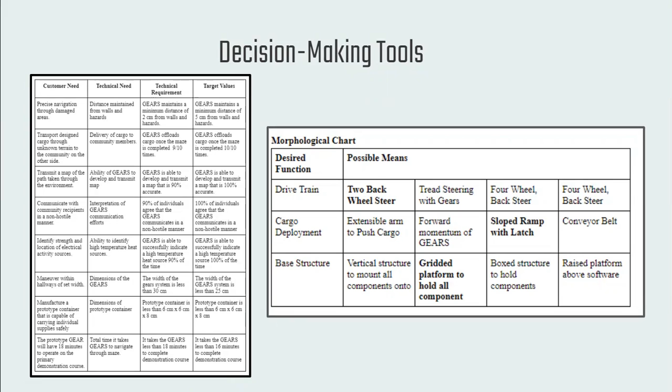In terms of the design, we created a morphological chart to decide how we would like to achieve the main mechanical components of the GEARS, and we divided the GEARS into three main parts physically: the drivetrain, the base, and the cargo deployment mechanism.

When first conceptualizing the GEARS design and the necessary technical requirements, our team focused mainly on hazard detection and ease of mobility. In order to maintain a minimum distance of 2 centimeters between non-traversable terrain, we knew ultrasonic sensors needed to be mounted on the sides and the front of the GEARS.

These sensors output the distance between the device and the objects in its pathway, so any terrain in its pathway would be detected. In order to drive around and avoid the terrain, our team knew a 2-motor powered driving system would be necessary for minimizing the turning radius while also reducing friction opposing its motion.

If the stability point was made from rubber tread, the powered wheels would not rotate and turn the device about its center point. Instead, the rubber's frictional force with the ground would apply torque in the opposite direction of the GEARS' angular velocity. This would prevent smooth, eased turning.

Therefore, removing the rubber tread from the wheel and leaving its inner rim would dramatically reduce that frictional force and allow the device to turn with very little opposition.

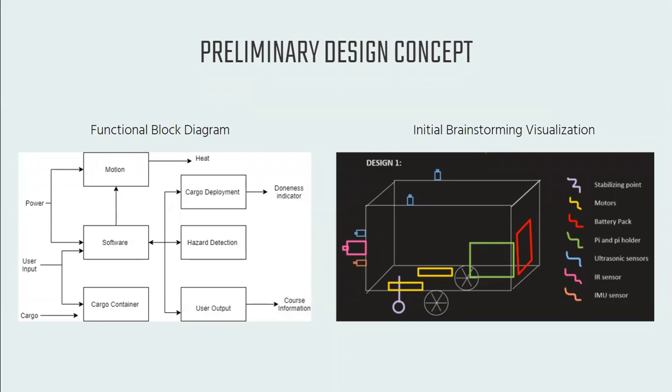After further investigation, our team determined the size of our cargo container was to be a maximum of 6 centimeters by 6 centimeters by 8 centimeters, and therefore, as seen in these images, a space in the front of the device was set aside for this 3D design container.

Some positive features of this first iteration included successful turning, as the 2-motor powered system with the treadless wheel stability point allowed the robot to maneuver with better precision.

Also, with the platform designed to hold the Pi holder and cargo container, the initial design had a sturdy foundation in order to hold the necessary cargo weight.

Finally, the ultrasonic sensors and IMU sensors were optimally placed for ease of detecting hazards, and magnets representative of high electrical activity.

Some negatives included the lack of cord management and a lengthy posterior. Both of these unfortunately meant that the GEARS prototype would hit walls as it turned and brushed up against hazards.

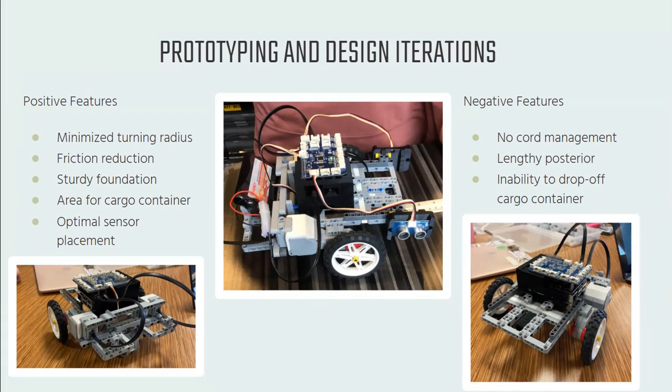Also, this prototype turned based on time. The motors would run at a certain speed for a specified amount of time, roughly turning in multiples of 90 degrees. This unfortunately had a large margin of error, especially on surfaces that were disleveled and caught the stability point during the turn. Finally, this device had no ability to drop off the cargo container, only the ability to keep it on its platform.

With further testing, analysis, and tweaking, our team determined the navigation system needed a gyro sensor, a sensor which outputs angle displacement. For precise turning, this was necessary because it ensured the gears would not over or undershoot specific turns, especially around sharp corners or when turning around completely.

Then, during testing, our team also built a slanted ramp system and a motorized arm on the front of the cargo container for the cargo container to be held and dropped off properly. The motorized arm would stiffen and lock the cargo container into place while the gears would maneuver through the destroyed area and then rotate down and out to the side, dropping off the container at the location of the recipient community.

The slanted ramp used the gravity acting on the container to slide off and onto the ground when the motorized arm rotated out. This kept the cargo from spilling out of the container and the container from sliding off the device while driving through the terrain.

Finally, testing also meant being able to move around sensors for optimal placement. The IMU sensor and IR sensor were both moved to the very front beneath the cargo container in order to detect hazardous zones and dangerous activity, and the ultrasonic sensors were kept on the sides and front of the device for detecting the walls representing terrain.

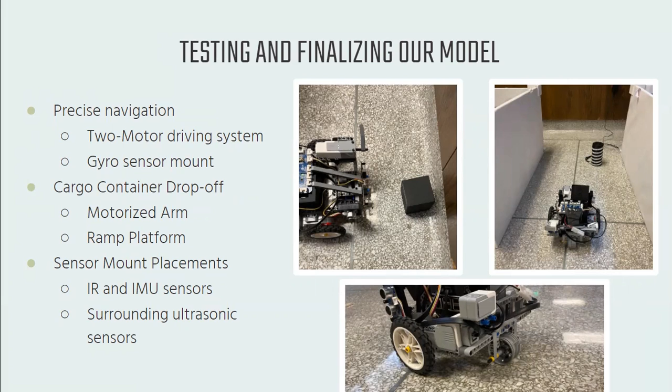The battery holding structure was removed from the posterior and the cords were wrapped and managed to prevent any contact with the gears and any hazard it encountered.

The final gears design seen here has a few unique features, such as the motorized arm, which holds in the cargo container while the device maneuvers the damaged area. The two motor drive and stability point were used to optimize navigational precision, reducing the turning radius and frictional forces, and the cargo container ramp

was slanted for the container to drop off at the recipient.

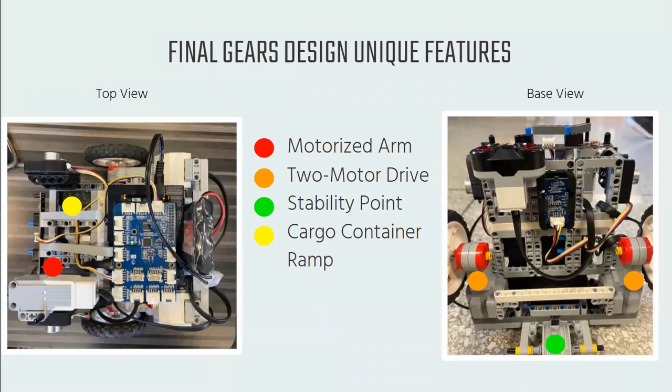So for our maze solving algorithm, we first chose to use the left wall maze solving algorithm. This algorithm follows the left wall at all times and is guaranteed to get out of the maze if the maze is solvable. First, the gear will check if the left wall is greater than 40 centimeters away from the robot. If it is, then the robot will move forward until it clears the corner before turning left.

So for detecting magnetic hazards and heat sources, the gear uses the IMU's magnetometer and the IR sensor. If the IMU or IR sensor values are detected to be greater than 250 milligauss or 80 respectively, then the gear will turn based on a modified version of the left wall following algorithm. All the conditions being checked and actions taken will be the same, except the gear will not check for a front wall because the hazard will replace the front wall in this case.

Likewise, the hazard's parameters and type will be stored to be later written into the hazard file. To store the gear's position, a matrix of zeros of the size of the maze is created, with the robot's starting position and starting direction included as input. Then the gear follows the maze following algorithm to go through the maze. Likewise, a list of hazards is created to store the hazards and their parameters, and both objects are written to separate files at the end of the program.

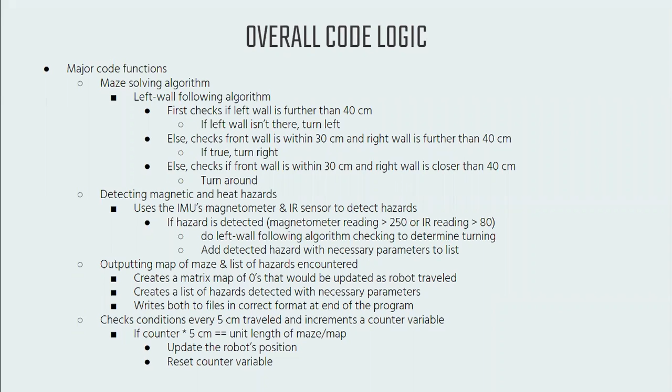And then the flowchart is on the next slide. First, the gear takes input parameters for starting direction, map unit length, starting position, and course dimensions. Then it creates a map of the course and a list of hazards inside of it. Then it first checks if it's outside of the maze, using both the current position variable and the sensors to determine if the gear has left the maze. If the gear thinks it has left the maze, it updates its exit position and deploys its cargo.

Otherwise, it checks the magnetometer and IR sensor values and turns based on the left and right wall distances around the gear at the time at which it detects the hazard.

If there are no hazards, then it moves forward and checks the left wall following algorithm values, turning left if the left wall is not present, turning right if there's a left corner, and turning around if there's a dead end.

Then it checks if it has traveled 1 unit length of the maze. If the counter equals counter max, it updates the matrix map and resets the counter to -1. The robot moves forward until it has traveled 5 centimeters and increments the counter by 1. At the end of the program, the gear writes the matrix map and hazard map to the respective files.

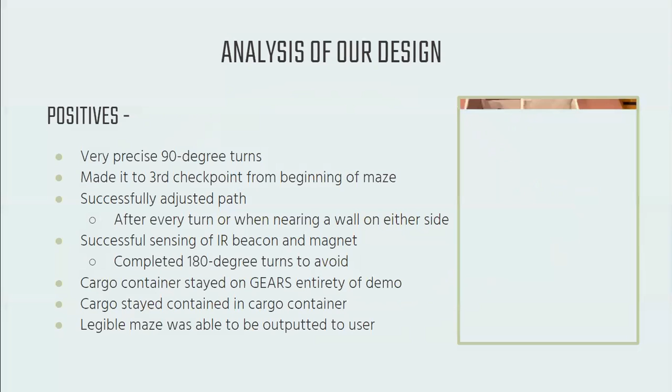Moving on to our results and conclusions, we're going to first talk about some of the positives of our demo. Overall, our GEARS performed very well during the final demo.

It was able to execute very tight 90-degree turns whenever a wall was sensed. It was also able to complete precise 180-degree turns whenever a hazard was detected. When our GEARS came across both the magnets and the IR beacon, it was able to detect the hazard, complete a 180-degree turn, and continue in the opposite direction.

Our GEARS was also able to successfully adjust its path while running. If the GEARS ever failed to complete an exact 90-degree turn or ended up too close to the wall of the maze,

it was able to correct its direction to continue on a straight path through the maze. This feature was essential to the success of our GEARS as it corrected errors in the turning mechanisms before they could cause any problems. If the GEARS had not been able to correct its path in this way, it would likely have run into many walls, hindering its ability to get very far in the maze.

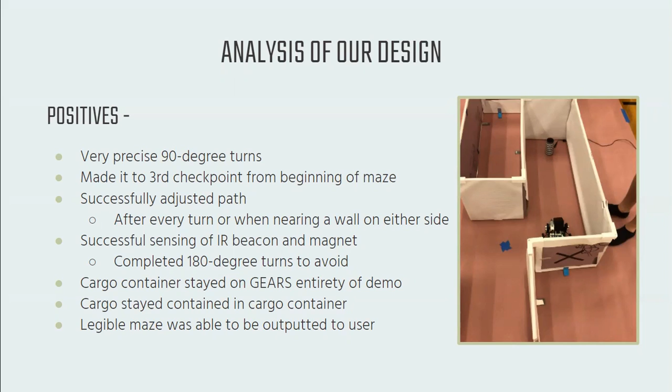Another success of our GEARS was its ability to keep the cargo container on the robot for the entirety of the demo. Had the cargo been offloaded during the demo, the container also would have been able to keep the cargo contained. Finally, we were able to output a maze to users to indicate the path that our GEARS took through the maze. Next, we're going to discuss some of the negatives of our demo.

One difficulty that our GEARS ran into was the one pictured here. It ended up running into this wall multiple times during the demo, and we came to a realization later that the GEARS was sensing the wall in front of it too soon,

which indicated that it should turn left too early. In order to solve this problem, we would just have to lower the front wall sensing threshold so the GEARS would not be sensing walls too early and turning when not necessary. This would not be a difficult thing to change, it was just not able to be done in the moment.

While it is likely that our cargo offloading mechanisms would have worked successfully, we were not able to test them in the final demo. The only issue we could potentially see occurring with the unloading would have been offloading the cargo in an upright position. It would have likely taken a few tries to get the cargo unloaded in the correct orientation.

So overall, our final discussion ends with the fact that mechanically our robot was very well built. There's not much we would change about the way we built our robot. It was very compact, which kept it from hitting walls, and it allowed it to make tight 90-degree turns without running into anything. Our code also allowed for fairly precise navigation of the maze.

Like I said before, 90-degree turns were very precise when a wall was sensed, and the 180-degree turns were also very precise when a hazard was sensed. We were also able to successfully output a map when going through the maze, and the cargo offloading system would have been successful had we been able to implement it.

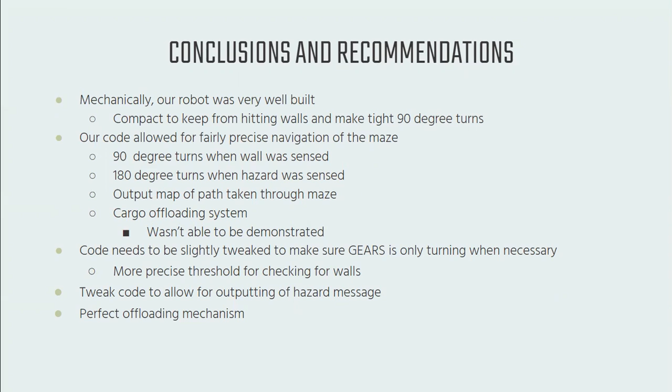And then we would have to perfect the offloading mechanisms to make sure that they worked properly and were implemented exactly when the GEARS system did exit the maze, and also allow for the offloading of the cargo to be in the correct orientation.